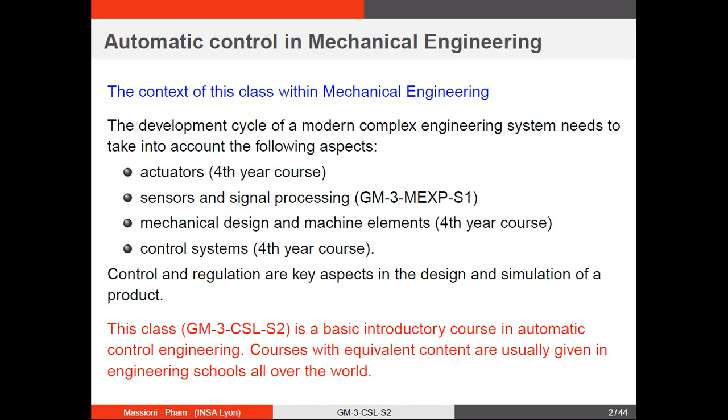This class is a very basic introductory class, like many others taught everywhere in the world, and it will give you the basic introduction to this topic.

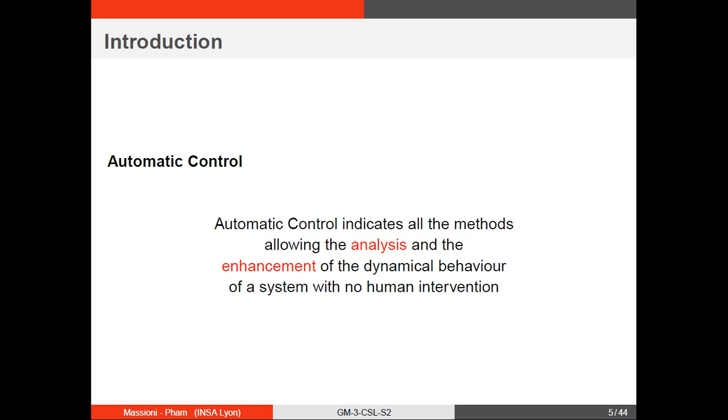So what is automatic control? You can read it here: all the methods allowing the analysis and the enhancement of the dynamical behavior of a system without human intervention. That's what I try to say. Imagine you want to drive a car. You can do it by human, or you can do it with an automatic car. So this is the topic of automatic control.

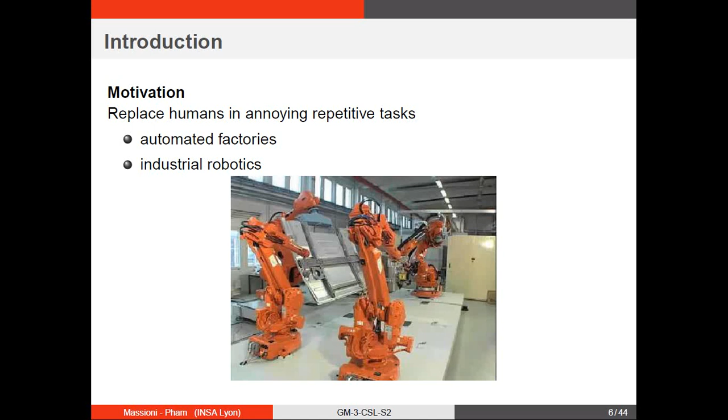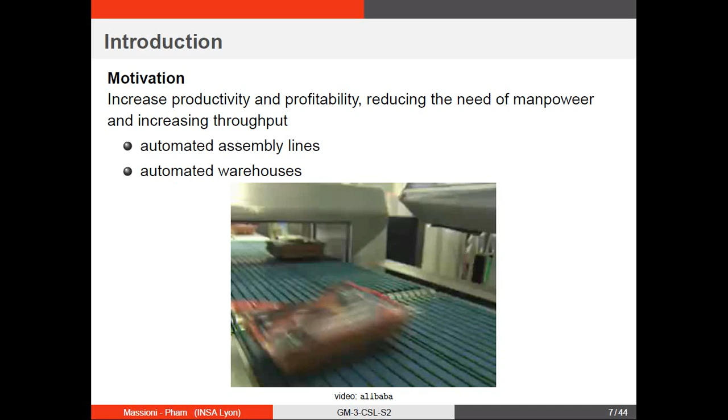As a result, you can replace humans in annoying repetitive tasks, but also be better than humans. So instead of having a worker, you can put a robot, and this has a great enhancement effect in factories and industries. This either increases the profitability of the industry and the precision, the reliability, etc. You can also have a look at assembly lines and warehouses as examples of this.

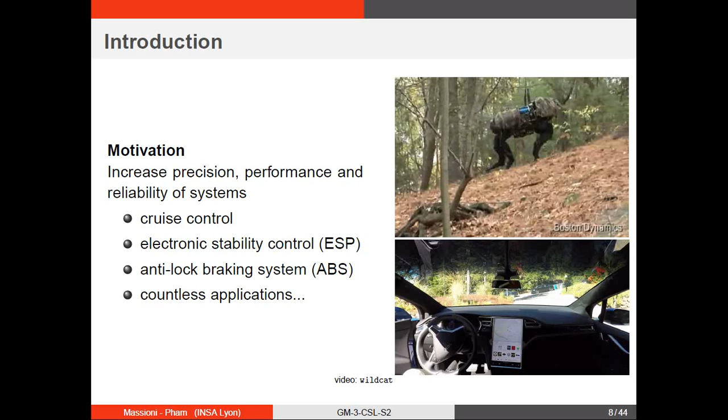Other examples still in industry, you can just go into YouTube and have a look at all these amazing things you can find, like automatic cars or robots. You can have all kinds of applications in countless industrial fields, and even more dreaming applications, like you cannot send humans to Mars, but you can send robots. These robots have to be automated, or similarly for other dangerous places like inspection, nuclear plants, or bomb defusing, etc.

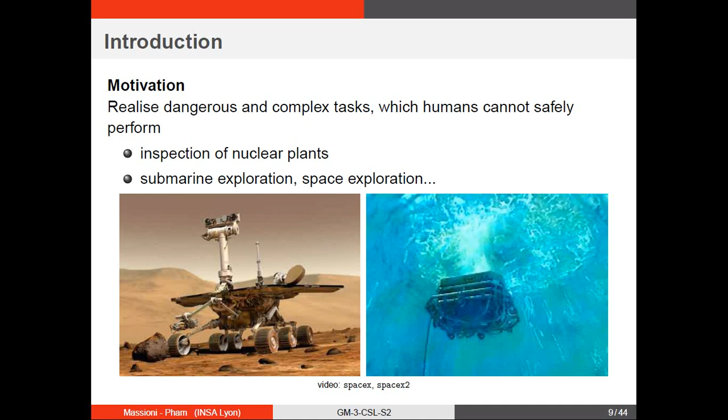So it makes sense. If it goes too fast, you close the valve a little bit, so it will slow down. If it goes too slow, you open it up a little bit and it will go faster. And actually what they found out is that it didn't really work that way, and there were some problems that they didn't forecast.

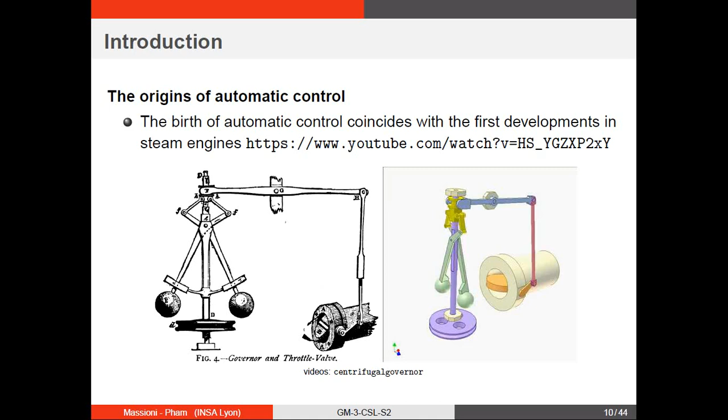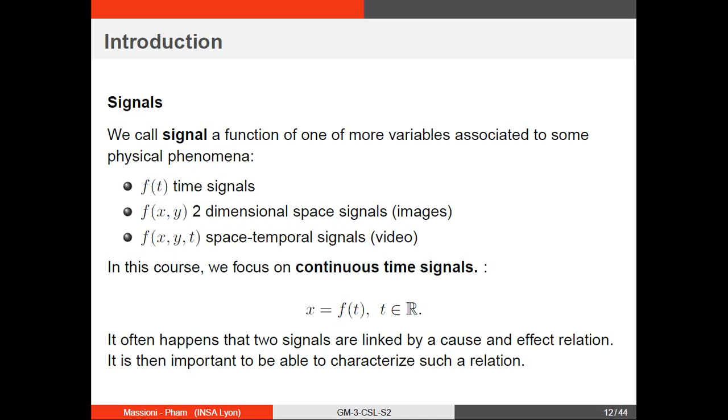And what we actually focus on is the cause and effect links between signals, because one signal could be the effect of another signal, which is the cause. We call this kind of causal relationship a system. So a system is anything which establishes a relationship between some input signals, the cause, and some output signals, the effects.

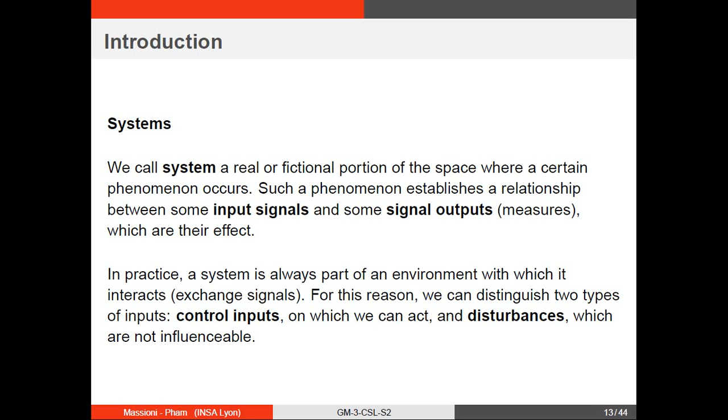You can imagine it like an input signal goes into a system, and the system will provide, as a function of this input signal, some output signal. And a system is always part of an environment, so there will be multiple systems interacting in most cases. Also, considering the inputs themselves, in most cases we can distinguish two types: inputs which are out of our control, which we call disturbances, and inputs which are in our control, which we call control inputs.

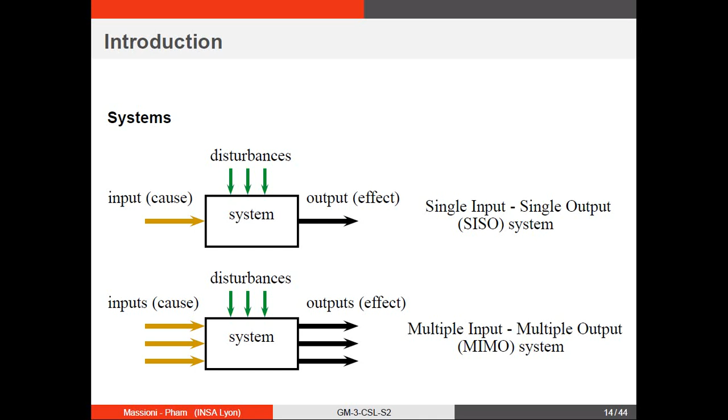So let's look at this picture here, which provides a visual description of what I just said. This is a typical block scheme employed in most cases in control engineering. In the first case, you have one input and one output, and several disturbances; these kinds of systems are called SISO, which means single input, single output. Or you can have multiple input and multiple output. Let's see some examples of what a system can be.

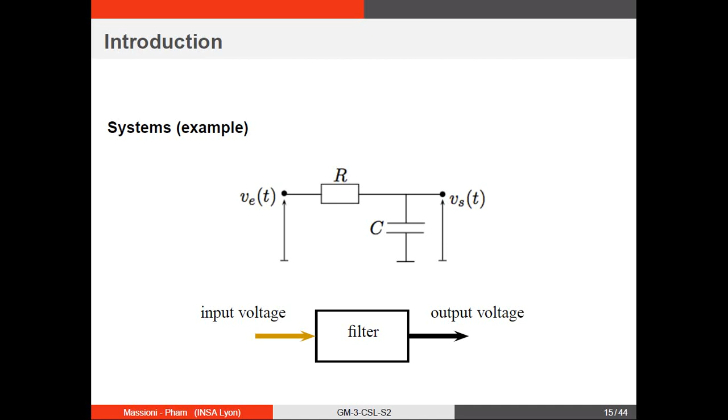Let's look at a more mechanical example. Consider a car. What are the inputs of the car? The control inputs are gas pedal, brake pedal, steering wheel, etc. What are the disturbances? Well, whatever you cannot control directly: wind, traffic, road conditions, etc. And what is the output? Well, the speed of the car, the location of the car, etc.

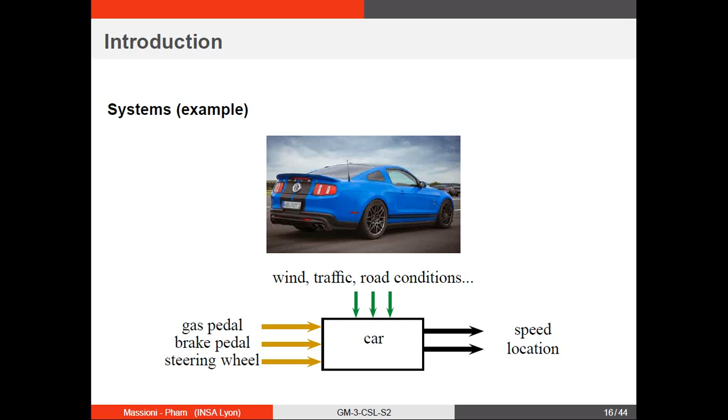So imagine you want to drive this car now. Imagine the road is straight, there is no wind, there are no other cars, no traffic, etc. In principle, you might just orient the steering wheel and then keep the gas pedal down and go straight without even looking at the road. This is what we call open loop control.

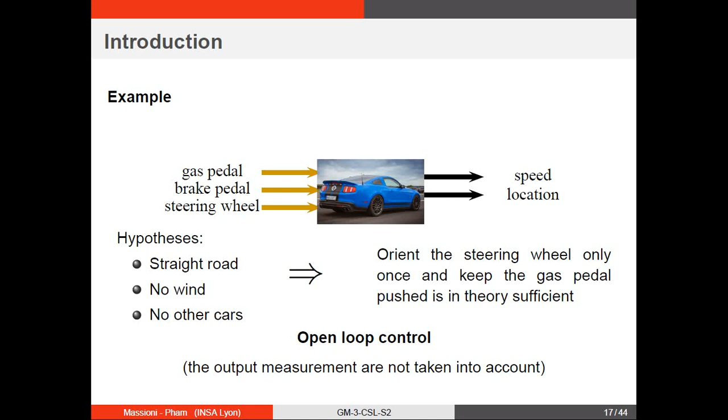What does open loop control mean? You don't look at the output, you don't look at your speed, you don't look at where your car is. If you are lucky enough and you know your car very well and all the external conditions, you can drive on your road without looking. Of course, this is not very safe, especially with disturbances. Imagine you have wind, other cars, the road isn't perfect. Can you really drive a car without looking? No, you cannot. You need to correct your action as a function of what you see outside. This is what we call closed loop control: control that takes into account what happens, taking into account your measurements.

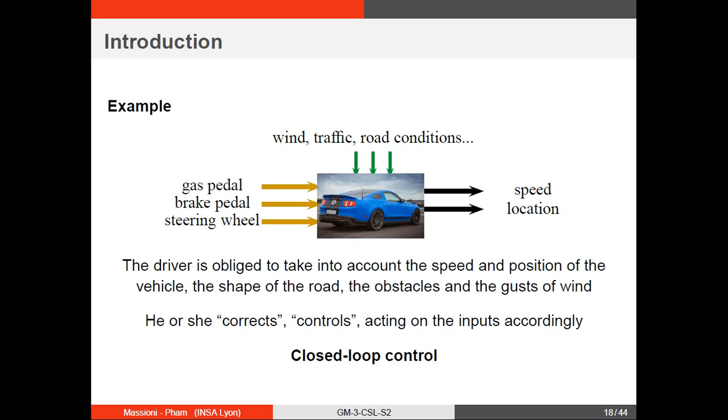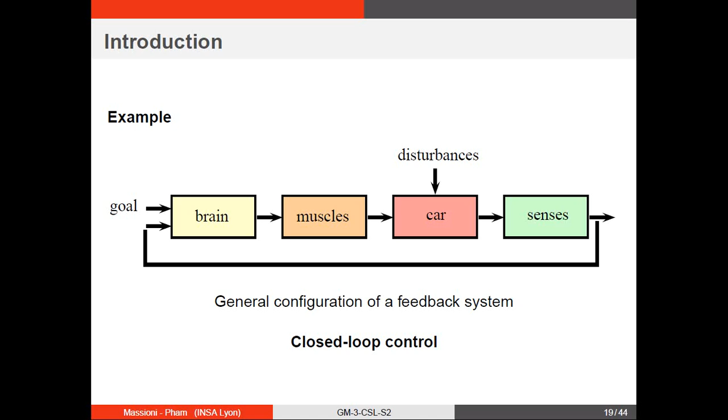You can look at the example of the car, of the driver driving the car. You get a reference, say a goal, which is compared into your brain from what you see, and you look at the road. Then the brain will act on your muscles, steer the car. The car is also subject to external disturbances, and then the result will go through your senses, will go through your eyesight, and you can use the output of the senses to correct your action. This is a typical closed loop control scheme, which generalizes into this for any situation different than the car.

You have a goal, and you have a first logic, let's say, called controller, which compares the goal and the measurement. Then you have an action required to some power delivery system, which acts on the system itself, the car, for example. And then the result of the system goes into some sensor, and the sensor provides useful information for the controller.

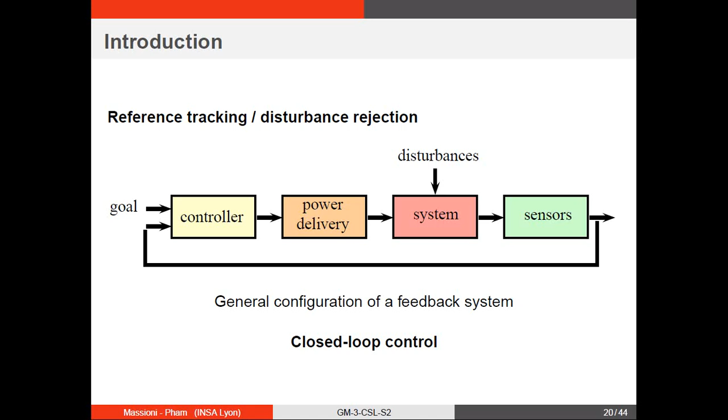The controller works trying to bring this error down, so it looks at the error and then decides a control action, basically how we have to act on the gas pedal. Then the gas pedal is the tool which brings the power to the engine, and it provides a physical input to the process, to the car. So engine speeding up or down.

The engine is also influenced by the external situation, so wind, whatever. And then we have the speed of the car, which is measured by a sensor and provided back to the controller.

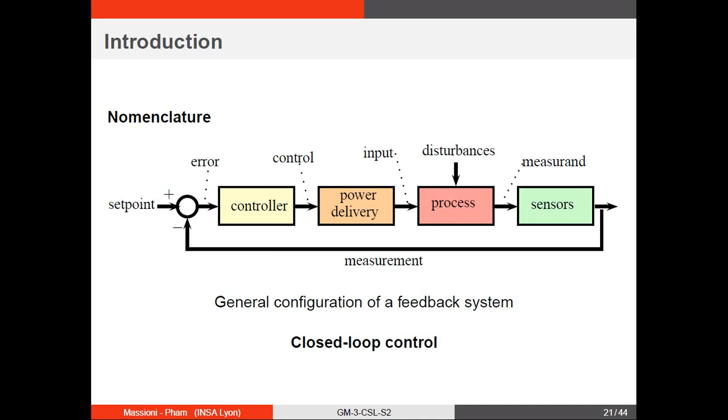So the goal of this class is to give you some hints, some ideas of how to have a general procedure for designing a control system. So you probably have some specification of what you want to obtain. Then we have to analyze the system that you want to control. And then the key part is to determine a control law, which means what we put inside that controller box, which might be a computer, an analog device, or even a mechanical device, as we have seen for the flyball regulator example. And then, of course, we need to be able to validate the result of this procedure.

So, what kind of specification might you have? Well, there are several objectives you might have when you want to steer a system. We can distinguish mainly two. You might have two main goals which can appear at the same time. The first, we call it trajectory tracking. As we said, you have a set point for one of your variables of your system, like speed of car. You want to set the speed, so you would like your car to follow exactly the speed that is imposed.

The second kind of specification is what we call disturbance rejection. It means that basically we want to make sure that the system behaves regardless of the disturbance. So you might think that, keeping again the example of the speed of the car, your car keeps the speed even if there is wind outside or the road slopes up or down, etc.

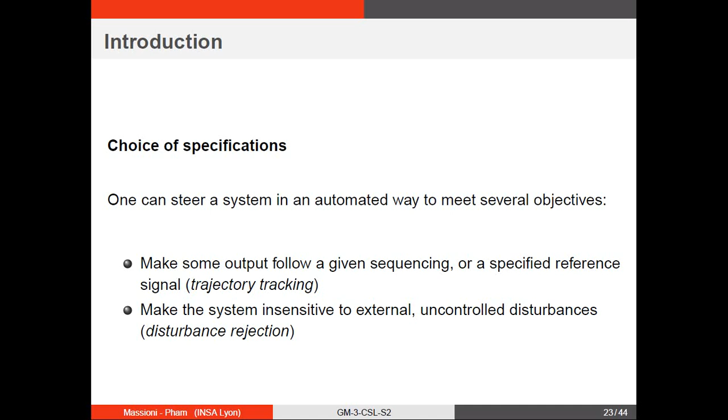Concerning the analysis, we surely have to understand which are the signals that are involved in any system, and the first important thing to understand is to distinguish them as inputs and outputs, and each of these inputs has to be classified as controls or disturbances. And the outputs, you might have outputs that are measured by sensor, so they are visible, or not measured at all, but still they might be important.

Then what is key is to find a mathematical model characterizing the relationship between these signals, so how the outputs are determined by the input. And this can be done basically either by the laws of physics or from experiment. And then study of the characteristics of the system with the help of the mathematical model. This is also called study of performance.

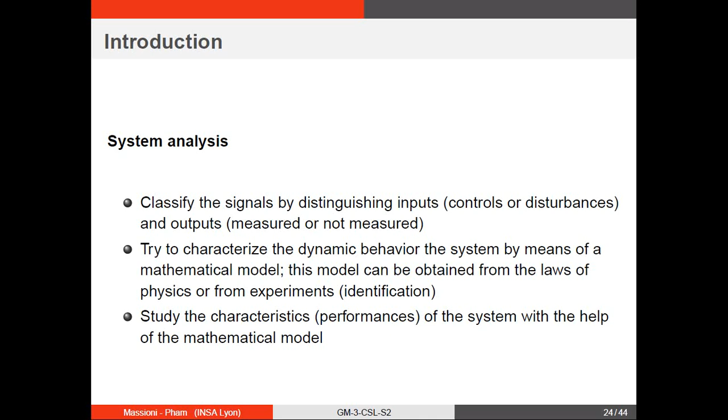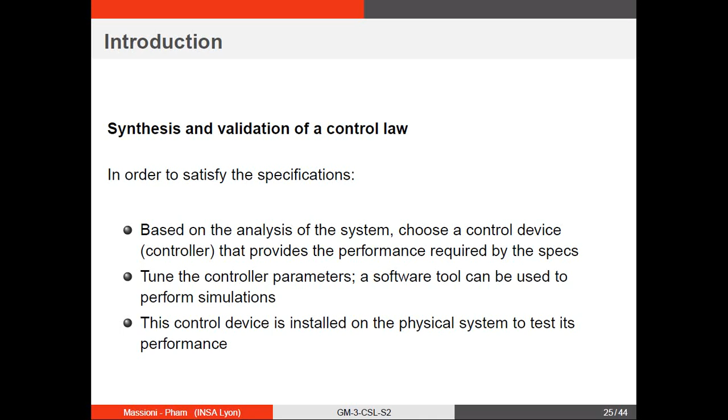Synthesis and validation of control law: based on the analysis of the system, you should be able to choose the kind of control device and the law, and tune the parameters that provide the desired behavior. Once this is done, one can perform a simulation with some software to forecast what is going to happen, and then of course the last step is to realize the system and test it in reality before production at mass scale, let's say.

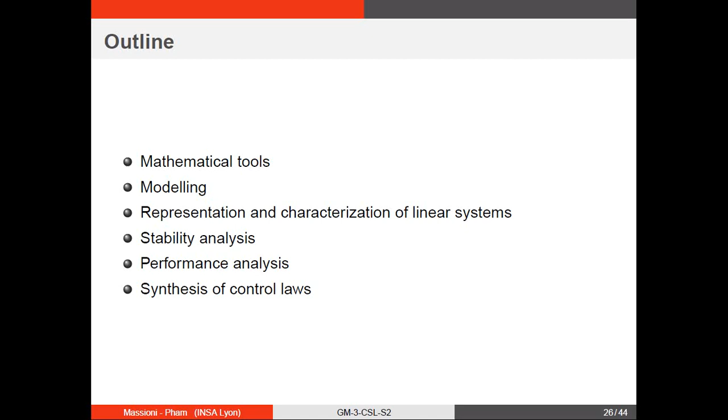So this is what is going to come for the rest of this class. We have to review a little bit the mathematical tools, then we'll go into modeling of systems, representation of systems with some nice graphical tools. Then we go to the problem of stability, which probably you have already seen in classes of mechanics. And then we'll go to the performance and synthesis of control law.